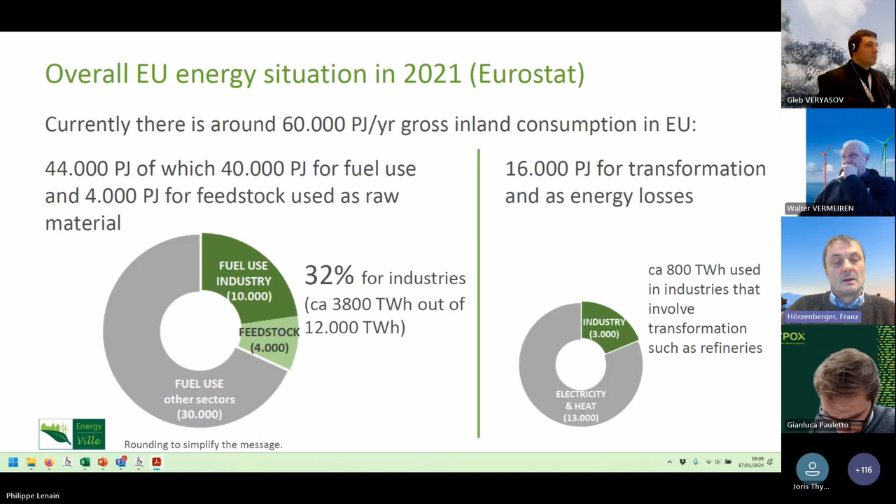Can we go to the next slide? So this is the situation for the industrial sector covered within A.SPIRE. Around 80% of the total energy consumption in industry is covered by the A.SPIRE sectors. Another interesting number is that around 25% of energy used in industry is electricity today - the rest is fossil energy. Can we go on to the next slide? So, let's stop here for a moment.

We got the opportunity to use the methodology which was developed between the DG ENER, so from the European Commission, and EnergyVille, the institute which is behind this study. They have developed a methodology to figure out the needs of energy based on the NUTS-3 level, so on a quite detailed level in Europe.

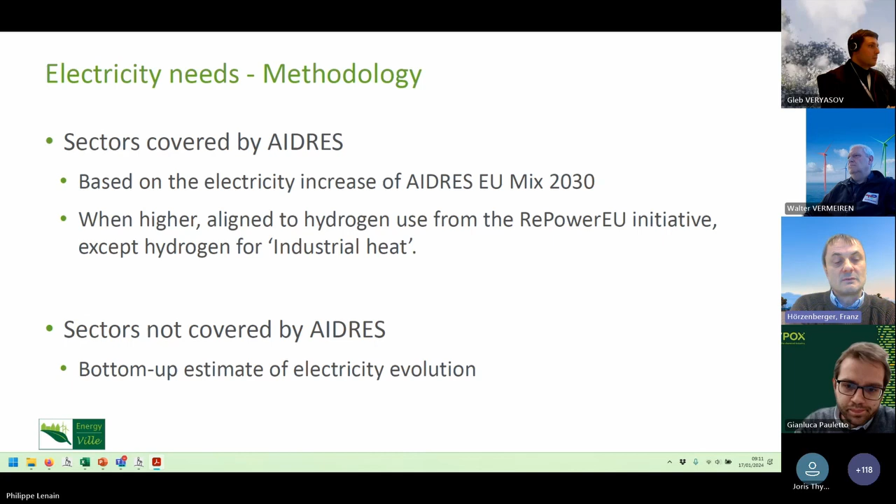And they also based their calculations upon policy documents. One was the REPowerEU initiative, but we also worked on an EU Mix 2030 scenario, which is somewhat modified towards industry. So these two scenarios have been used in order to calculate the energy or electricity needs of the future. Can we go to the next slide, please?

So here you see an idea of the energy needs of the future. Today, just to give rough numbers, around 1,000 terawatt-hours a year are used by the industry in Europe. So 1,000, just to remember this number. And what is projected with these scenarios is that around 500 terawatt-hours will be added until 2030. So more or less plus 50% electrical energy towards industry in 10 years. This is more or less the expectation which was calculated.

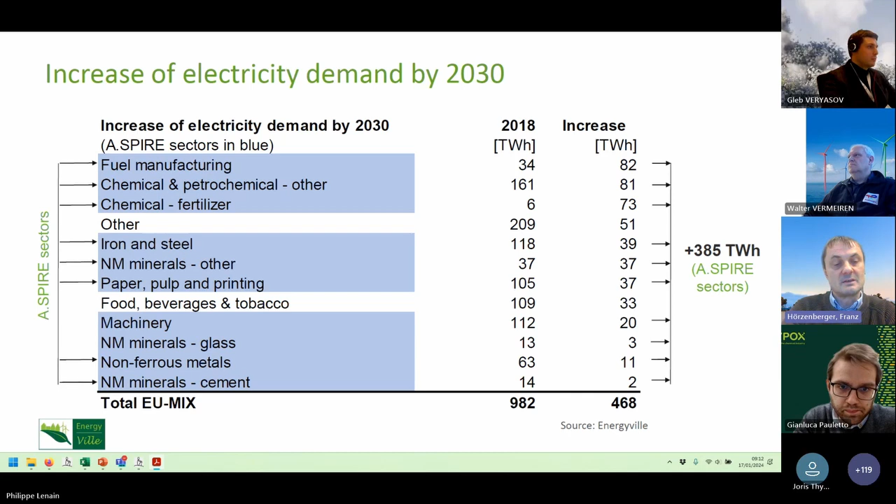Can you move on to the next slide? This we can skip, it's the same information as before. And as I already said, there are two scenarios which have been used for the calculation. One is REPowerEU. What is mentioned in REPowerEU as assumptions has been converted into energy needs. And you see here numbers for direct electrification and hydrogen, syn fuels, e-fuels, and then the fertilizer, which also needs quite some electricity.

And then there is another scenario, which is called the European mix. In this scenario, there is more direct electricity use, more production of fertilizers in Europe, but the direct production of hydrogen in Europe is lower. So these are the differences. Okay, we can move to the next slide.

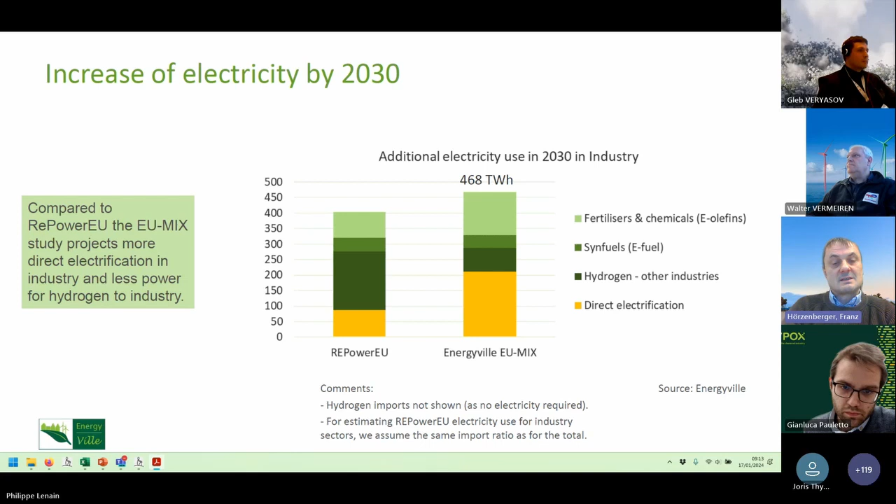So here is the summary. Compared to 2018, we need around 50% more electricity in industry. Around 50% of this increase goes to hydrogen plus derived fuels, chemicals, fertilizers, and the other half is more or less direct electrification of processes. So this is the estimation which has been found by this study.

Now we will move on to electricity supply, in the next slide. So here is still demand. This is more or less the same information as before, but now with all European sectors. One sector is industry, with around 1,000 terawatt-hours needed in 2020. Then we have the other sectors which are put together: mobility, residential, all the other sectors. And then there are also energy losses, which are mentioned here.

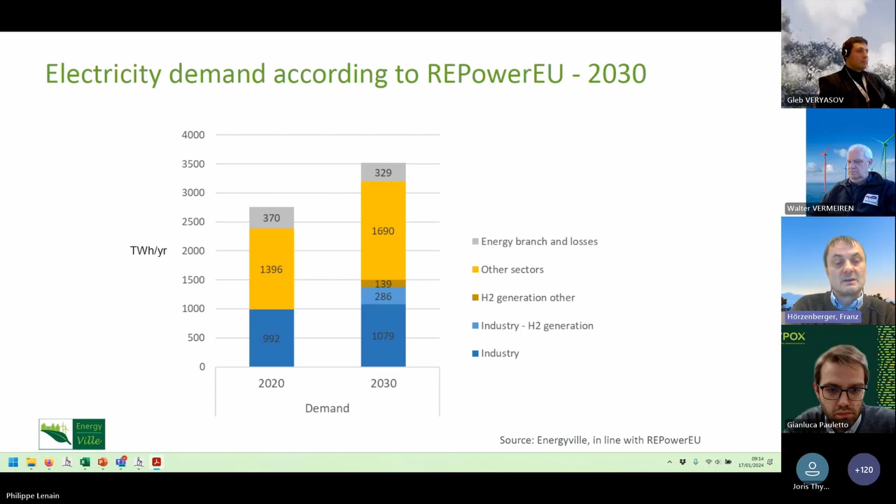And then there is a projection towards 2030, with hydrogen generation for industry included, and then the other sectors. So you see that the total electrical energy need is expected to grow towards around 3,500 terawatt-hours in 2030. This is the expectation that we made here. So the demand side you see here, and on the other side, it's about the supply side.

In 2020, using rough numbers, there is around 1,000 terawatt-hours of renewable electricity, and around 1,700 terawatt-hours of fossil-based electricity. In order to meet the demand in 2030, we need to increase the amount of renewable electricity and reduce the amount of fossil-based electricity. The amount of renewable electricity which is expected in 2030 is 2,400 terawatt-hours, according to this study. So can we go to the next one?

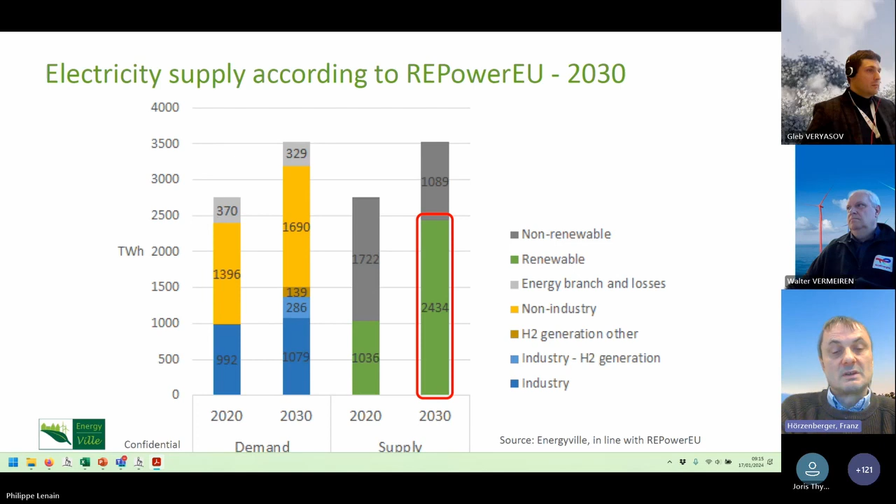Next slide. Now you see the same column that we saw before. It's around 2,500 terawatt-hours which is needed in terms of renewable electricity. The European mix scenario even says a little bit more, around 100 terawatt-hours more. And what we do on this slide is compare with the supply side expected according to different European scenarios.

The first one, in yellow, with 1,476 terawatt-hours, is the national projection. So if we continue like we do now, we will end up in 2030 with around 1,500 terawatt-hours, and the need is 2,500.

If we run with a speed of plus 50 gigawatts capacity expansion for renewable energy in electricity per year, then we end up with around 1,700 terawatt hours additional in 2030. There are different scenarios given here, which end up with different numbers, but you should look to the last one.

There is one calculation which is based upon 100 gigawatts per year renewable electricity extension. If this happens, then we are very close to what we should have. And there are two other scenarios which also describe that this could be possible in Europe. So you should remember that we need a capacity expansion of around 100 gigawatts per year, at least, in order to meet the electricity demand. Can we go to the next slide?

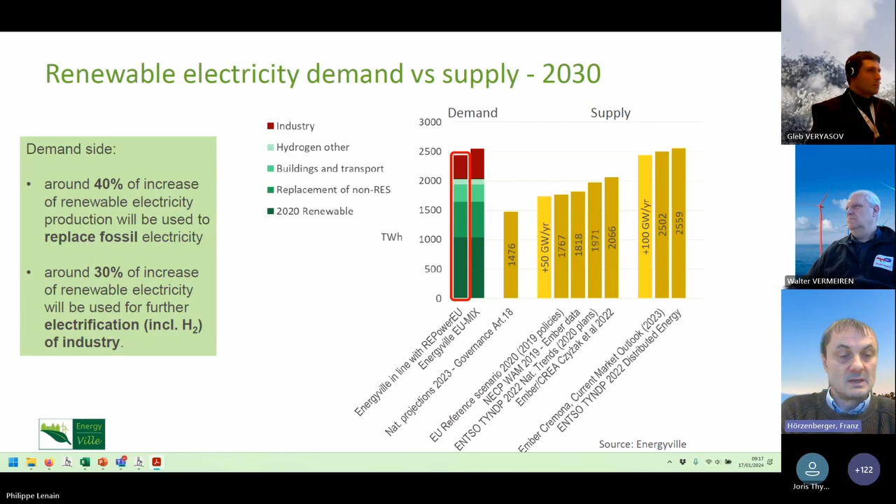According to the national projections, we have a gap of around 1,000 terawatt hours. So if we continue like we are, we end up with a deficit of 1,000 terawatt hours in 2030. If we are able to move with a speed of around 100 gigawatts per year extension, then we could be close to what we should have. Can we go to the next slide?

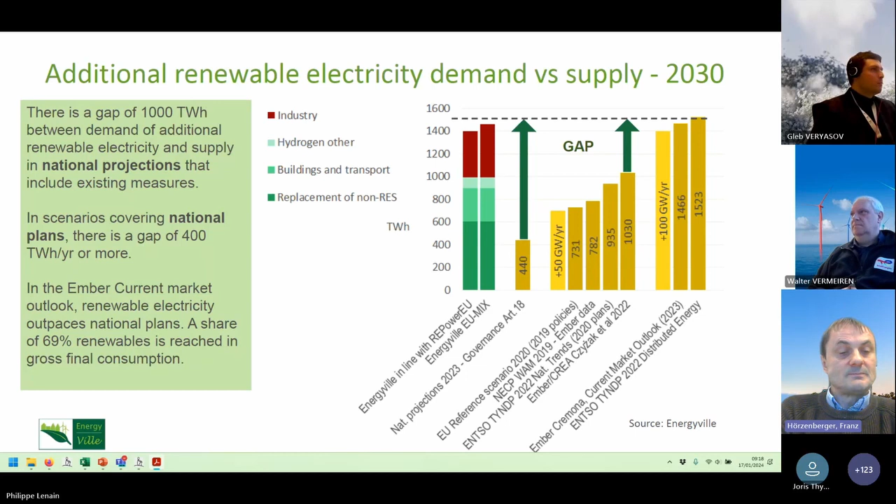These are now the conclusions from the study. Renewable electricity extension needs to increase by a factor of around 2.3, so 2 to 2.5. This is really necessary; otherwise, we will never reach this electricity supply in 2030. Future renewable electricity supply will fall short compared to the needs of the process industry in a scenario that incorporates REPowerEU ambitions. So if you follow REPowerEU, we will not have enough electricity available.

As I already said, with the national projections, if we continue like this, we will have a shortage of 1000 terawatt hours. If we follow national plans, which are much more ambitious than the national projections, we also end up with a shortage of around 400 terawatt hours a year. And in order to really be compliant with what we want to do, we really need these 100 gigawatt per year extensions for renewable electricity capacity. Next slide.

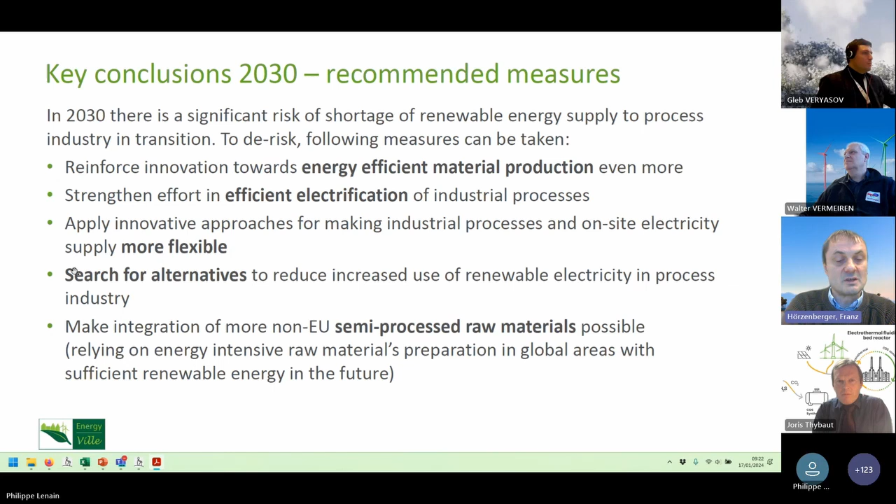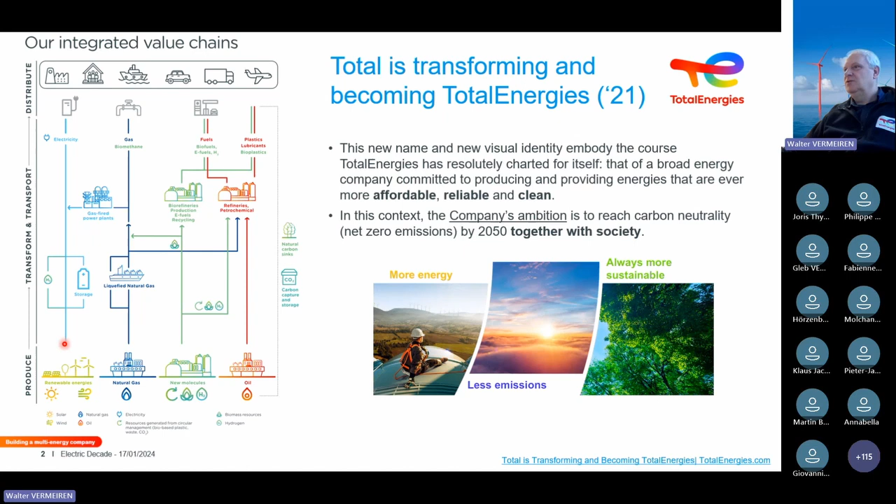So far, Total is still a very integrated company where we produce energy, we transform the energy into something that can be sent to the market, and we supply it to the customers. And what you will see is that we are moving from a fossil-based or a petroleum-based company more to a renewable energy company. And our vision is the following on this slide. So in 2022, our energy mix was still 90% fossil, so mainly petroleum, liquids, and natural gas. And we had a little bit of more or less decarbonized electricity and some biomolecules, biofuels, and some biopolymers.

We believe that in 2050 it will be completely different. So we will be a producer of 50% decarbonized electricity. 25% will be low carbon fuels like biofuels, but also the biopolymers will be part of that. And then still 25% will be fossil-based, so a little bit petroleum, and still a significant part will be natural gas. At the same time, we are convinced that our company has to capture and store between 50 to 100 million tons of CO2 per year by that time. So we are becoming more and more a multi-energy company that is undergoing this transition to a low carbon society.

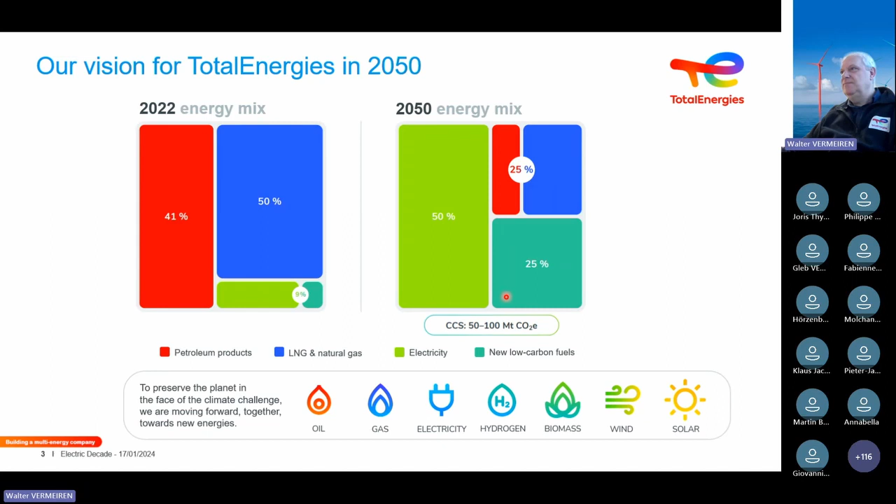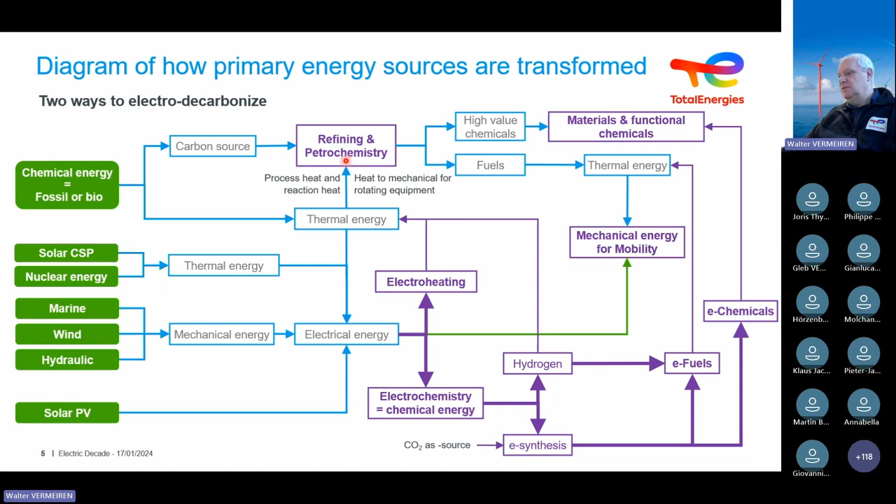So how much heat is in fact needed? If you look to the overall energy demand, roughly 40% is used by the industry, and of this 40%, more than 50% is just to produce heat to run the process. And this is today still mainly fossil-based. And what are now the temperature levels?

So 50% of the required heat to run the industry needs temperatures above 400 centigrade. And there is the interest to electrify, because for low temperatures, there are a lot of other opportunities to electrify or at least to decarbonize. In particular in refineries and petrochemical complexes, you need a lot of high temperature heat.

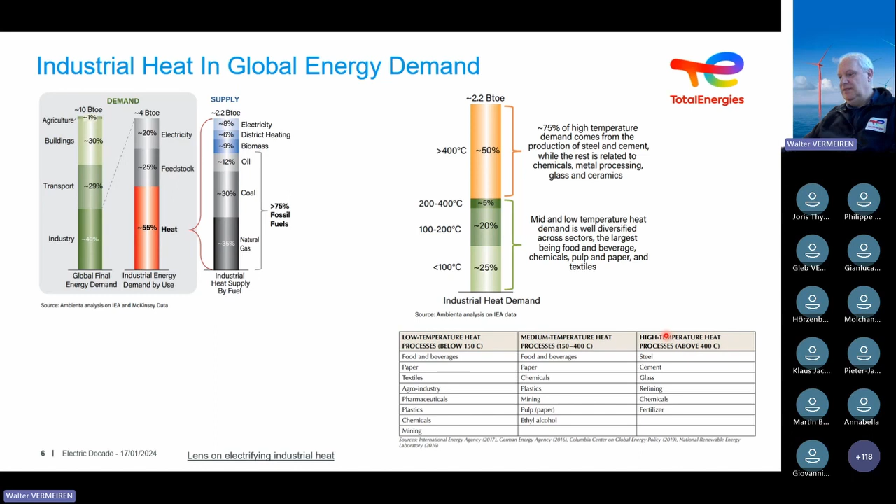Now, with respect to the cost of this energy, there is a significant difference today. So we have Europe and the US. The electricity cost in euros per megawatt hour versus gas, you see typically a factor 2 to 3 difference. So if we talk about electrification, we are going to use a source of energy that is at least 2 times more expensive than we are used to today. So this has to be considered. In case you have a high CO2 penalty, you can partially try to compensate this.

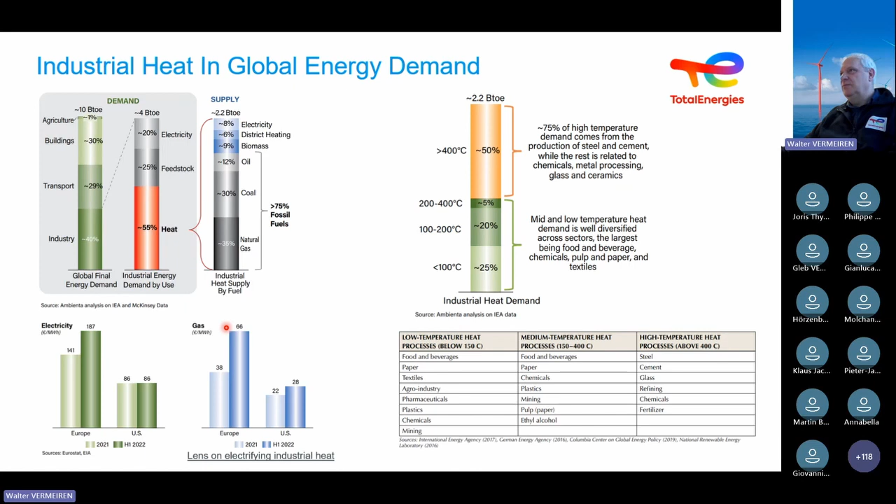Now, to come back to the 2 electro decarbonization concepts: direct electroheating or going via a kind of e-fuel. Just a comparison done by a consultant here. If you can use electricity directly for heating, you have overall 80 to 90% efficiency. So this is the concept of exergy. From electricity to heat, it can be extremely efficient.

If you would go through hydrogen, then you have first an electrolysis step, which is not extremely efficient. You have to compress and transport the hydrogen, which is not extremely complicated, but you need compression, and that again is energy. And overall, if you burn the hydrogen just to make heat, then you have 30 to 50% overall efficiency. So there is a factor 2 difference between direct electroheating or going through hydrogen.

So if you look now to the presentation of Franz, one of the big issues will be, are we having the right pace to implement the production of renewable energy, or electricity in this case. So it is important that we use this precious decarbonized electricity in the most efficient way.

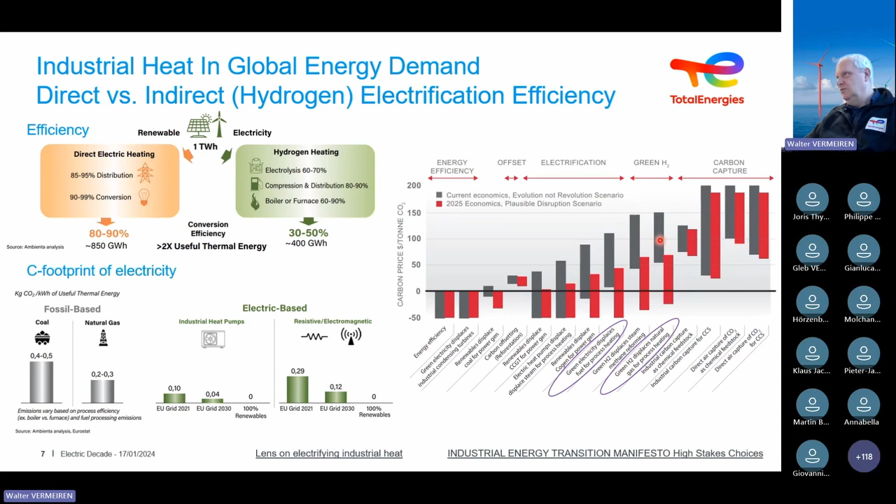A few years ago, KBC did a preliminary evaluation based on operational cost. What has to be the carbon price before someone would select a certain technology? It's evident that energy efficiency can already be economic today. If you look at electrification compared to green hydrogen, if you would use electricity for process heating, then you need a carbon price roughly around 75 euros or dollars per ton. If you would go through green hydrogen, it is twice as high. So this is something important to consider in the future.

So if we look typically at a company like TotalEnergies, we have these temperature levels. The highest temperature levels are steam reforming and steam crackers. Then in the refinery, a coker is high, and the rest is rather low. So electrification is probably the most opportune for high temperature processes, and in particular for processes that are endothermic. A process that is exothermic requires much less preheating. For instance, a hydrocracker is pretty exothermic, so your effluent comes out at a higher temperature than the feedstock comes in. If you optimize the heat exchange, then you don't need a lot of firing duty. So the most interesting conversions are the very endothermic processes.

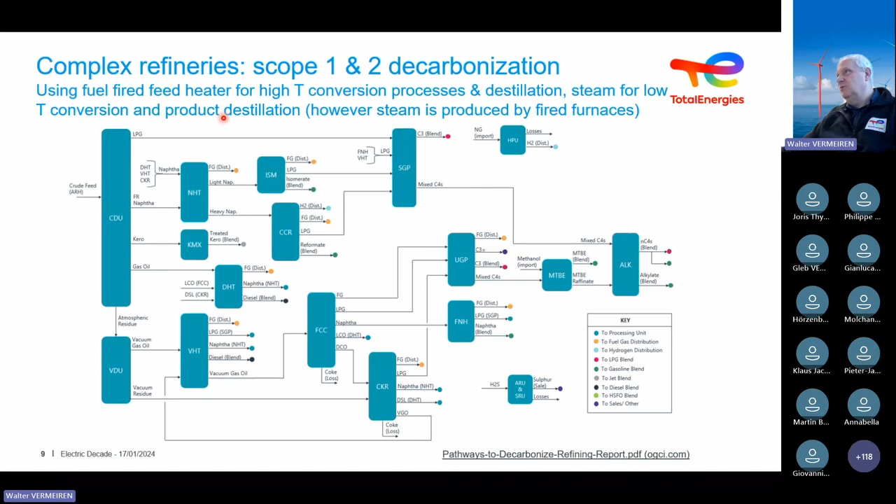With respect to refineries, which are very complex units with a lot of distillation, unit operations, conversions, and so on, some are exothermic, some are endothermic, and typically we have a lot of fired furnaces for high temperature processes and also for distillation. For instance, atmospheric and vacuum distillation go above 300 centigrade, so you heat with the furnace, not simply with a heat exchanger or with steam. Steam is typically used for low temperature processes and low temperature distillation. But we should not forget that steam is always produced in a fired furnace, so also emitting a lot of CO2. But for these operations, there are already, in principle, a lot of simple solutions.

A survey was done a few years ago, defining a kind of technology weighted score. This was done by OGCI, an association of oil and gas companies that exchange guidelines and opportunities on how to decarbonize our assets. So they developed a technology weighted score. It's evident that a few are very interesting already today, such as electrical drivers for turbines. Every time you can avoid condensing steam, you always have very high efficiencies. Electrode boilers can be implemented today because they have been known for many decades.

If you look at the heat replacement efficiency, they are all very close, because you have the efficiency of a furnace. So typically with electrification, you have a higher efficiency. There are two exceptions. One is using fatal, or low temperature, heat that is typically not valorized today: with mechanical vapor recompression, you have a very high heat replacement efficiency. And also if you avoid the condensing of steam, you directly gain a lot of efficiency.

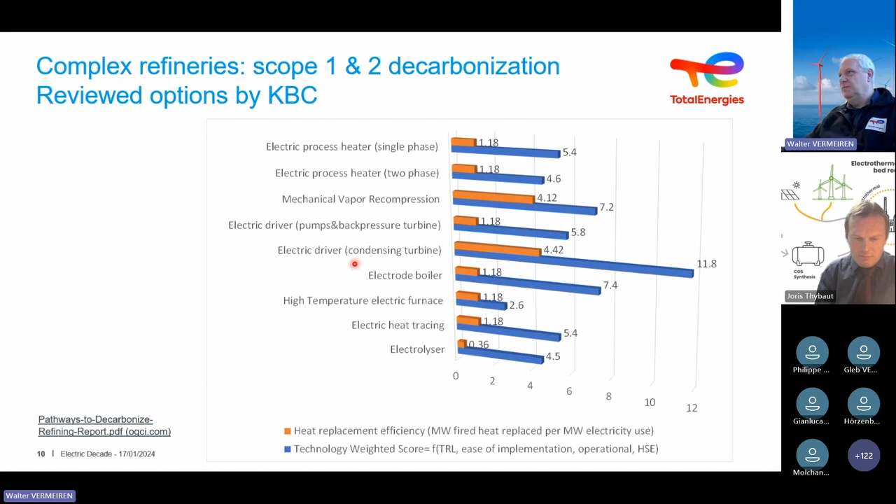So just two last slides on the Cracker of the Future consortium. A few years ago, we started this at the request of the innovation ministers in the Netherlands, Flanders and North Rhine-Westphalia, to save the petrochemical industry in this region, which is roughly 50% of the European petrochemical industry. They wanted to promote innovation, and the topic selected by the consortium was: can we electrify furnaces that run up to 850 centigrade?

This region is 50% of the steam cracker capacity in Europe. If we would need to electrify this, we need 170 terawatt hours per year, which is roughly 2 times the power consumption of Belgium. It seems a lot, but on the other side, it is perhaps not that much if we see that the installation of renewable power in Europe is going pretty fast.

It has to continue to go fast, but it is reasonable to decarbonize one of the initial conversion steps in the petrochemical industry, which is steam cracking, just by electrifying that.

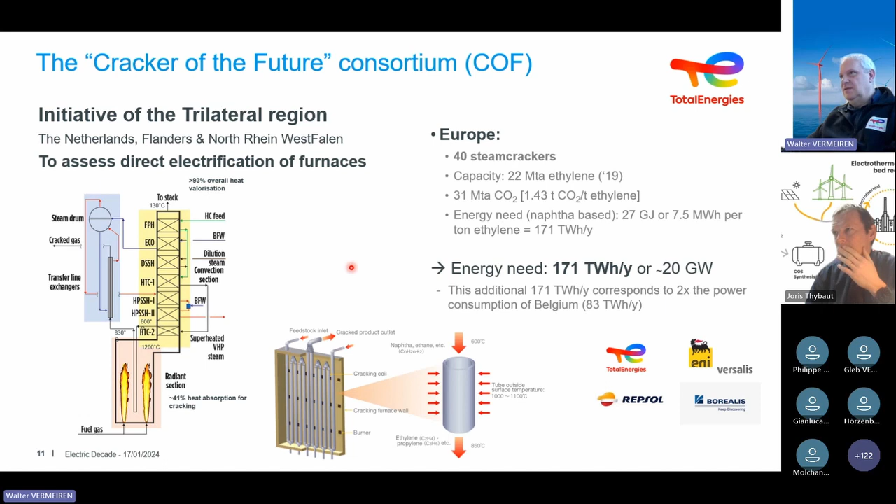This consortium has done a lot of studies on which type of heating technologies are possible. This is the conventional one: we have the firebox that radiates on narrow coils, so there is a transfer of heat from the coil wall to the molecules.

Finally they reach a high enough temperature that they start to decompose into olefins and aromatics. In the literature you see a lot of possibilities: microwave heating, radio frequency heating, electron beam, plasma technology, cold plasmas, hot plasmas. Shock waves can be used to heat up molecules. So there are a lot of possibilities.

The main or most well-known are resistive heating. They can produce infrared emission that is then conventional to a firebox. You can have resistive heating at the coil level itself, so you just put the potential on the coils. You can imagine inlays in the reactor that heat up the vapors.

I think Gleb will talk a little bit about the electrothermal fluidized bed, where you produce the heat on a particle, and the particle transfers that to the molecules that can then crack. And then you can also imagine inductive heating of inlays or the reactor wall of vessels.

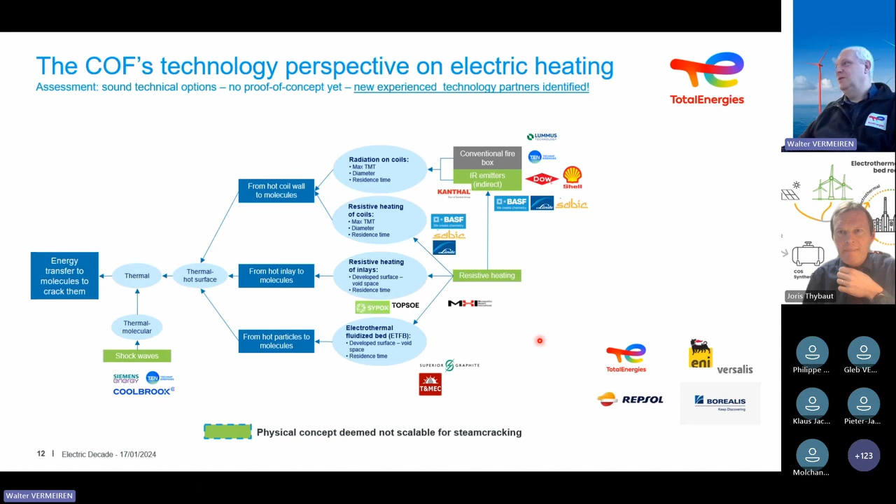Exactly, that's indeed what we will be working on, and what we are working on among other things, with the projects that will be presented in the next part of this workshop.

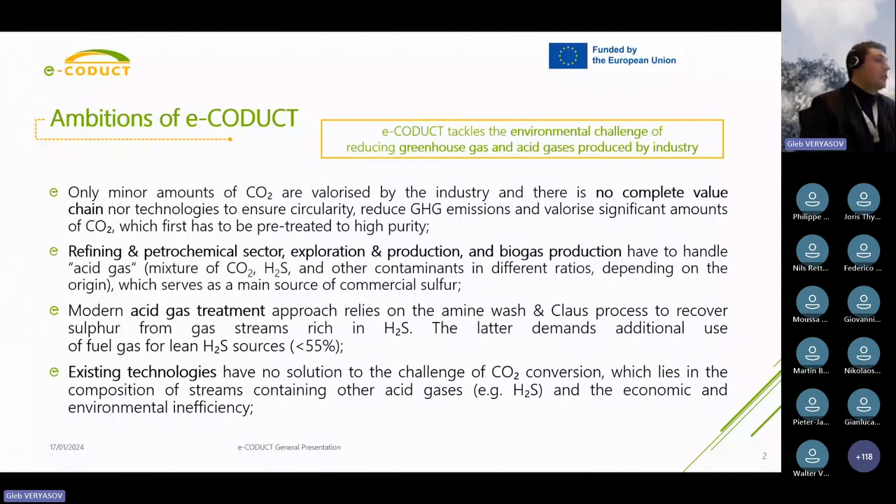The e-CODUCT project addresses all of these challenges, and we aim to convert mixed acid gas streams containing both CO2 and H2S. Our sweet spot is roughly 50-50 volumetric ratio, so this is the stream which would be potentially the hardest to tackle with existing technologies.

For instance, for sulfur recovery unit treatment of this stream, we would need to import fuel gas just to maintain flame, because such a dilute H2S stream is not suitable for Claus furnace. And for distillation, there would be very high energy demand with significant reject of CO2 in bottoms of the column.

We take the acid gas stream and treat it with a special catalyst adsorbent, which allows us to selectively produce carbonyl sulfide and remove water. Water is a side stream for us, and also a value for certain regions where water is becoming a scarce resource, which is why we contribute to the water-energy nexus economy. Then this carbonyl sulfide is decomposed thermally to produce carbon monoxide and sulfur.

These two steps are the core of the ēQATOR technology. Carbon monoxide is a versatile platform molecule that could be used, for instance, for Fischer-Tropsch process, aromatics production, methanol production, and paraffins up to sustainable aviation fuel grade. In our case, we selected methanol production as a well-known reaction, and we use a commercial catalyst with hydrogen import just to showcase that our carbon monoxide is convertible, so we could really valorize it.

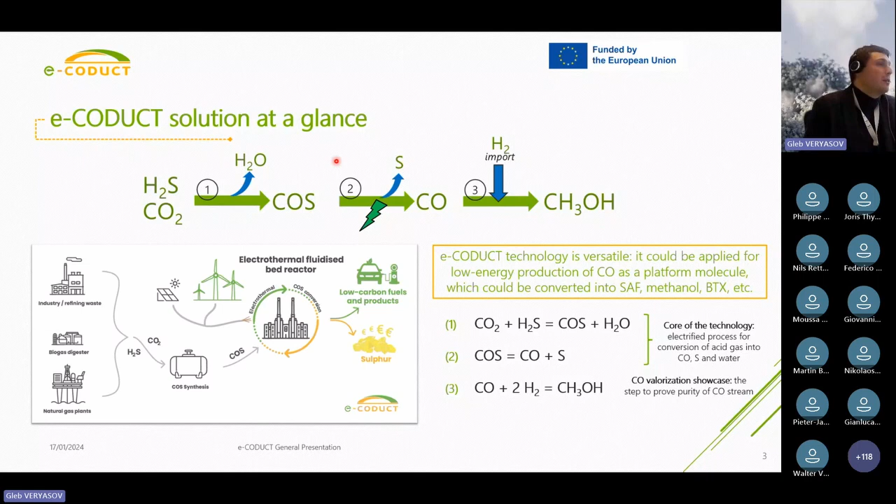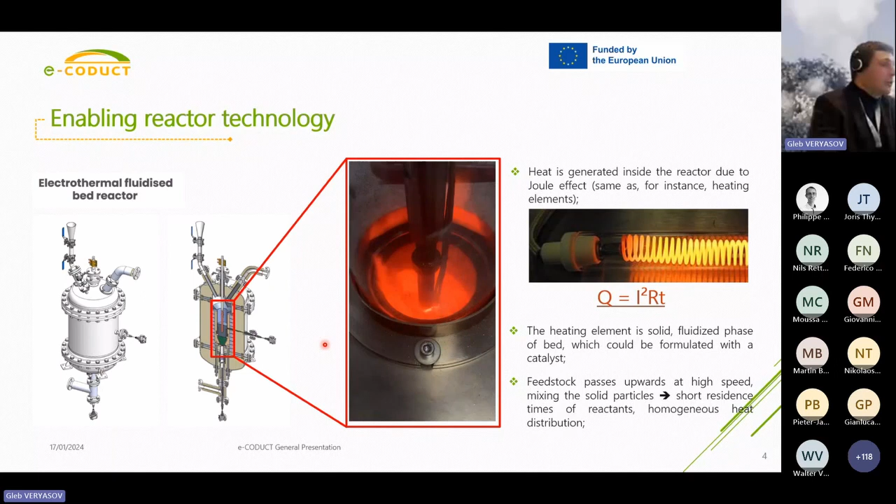The feedstock in our case is going upwards, and the gas creates this fluidization, which has a double function. First, it contributes to resistivity, an important factor for creating heating inside the catalyst bed, and it also allows short residence times and homogeneous heat distribution inside the reactor.

What is the competitive advantage of e-CODUCT technology and why we decided to select this pathway?

As I mentioned briefly, we could benchmark it against existing Claus process, where we will first need to concentrate our acid gas, or we will need to accept importing significant amounts of fuel gas, which would mean that we'll also increase our Scope 1 emissions. Another possible benchmark is CO2 electroreduction using, for instance, SOEC technology. Just thermodynamically, carbonyl sulfide is somehow a pre-activated molecule, or less stable molecule, than carbon dioxide, which would mean that just to convert this molecule, we will need to supply less energy compared to CO2.

The other side, of course, is that we could treat mixed streams. For comparison, SOEC technology is extremely sensitive to any contaminants, so any sulfur slippage to the cell, which is the main contributor to CAPEX, will irreversibly harm it because ceramics will get sulfidized and there will be physical cracks due to crystal structure change. Another important thing is that we co-produce sulfur, which is in principle a marketable product with quite high demand—we speak about roughly 100 megatons a year—while in the existing CO2 electroreduction approach, on the other side of the membrane there is just sweep air, and oxygen is vented in the form of oxygen enriched air, so there is some fatal heat constantly lost in the case of SOEC utilization.

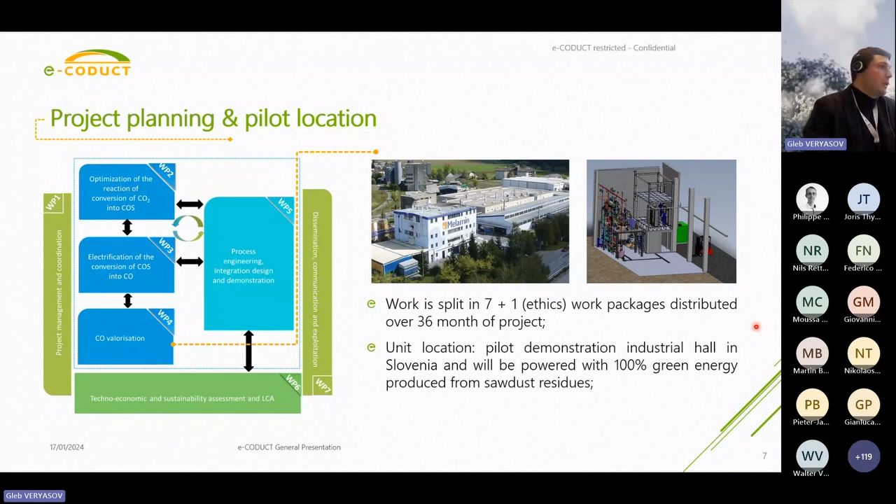If one day we rely on solar cells or windmills, we'll also account for variability of feedstocks, because those familiar with the refining industry know that acid gas as a feedstock could vary, since it's in principle a final waste of refinery operation. At the end, we'll have certification for sulfur quality and for methanol quality as a final product, and on this basis, Total Energies will create a business case for potential exploitation of the technology in one of our assets. Today, we already started analysis of different

market shortages for sulfur, for instance, and for methanol. There are some good scenarios which I think create a very interesting future for the technology. This is the final slide of my presentation. Thank you for your attention, and I'm open to questions.

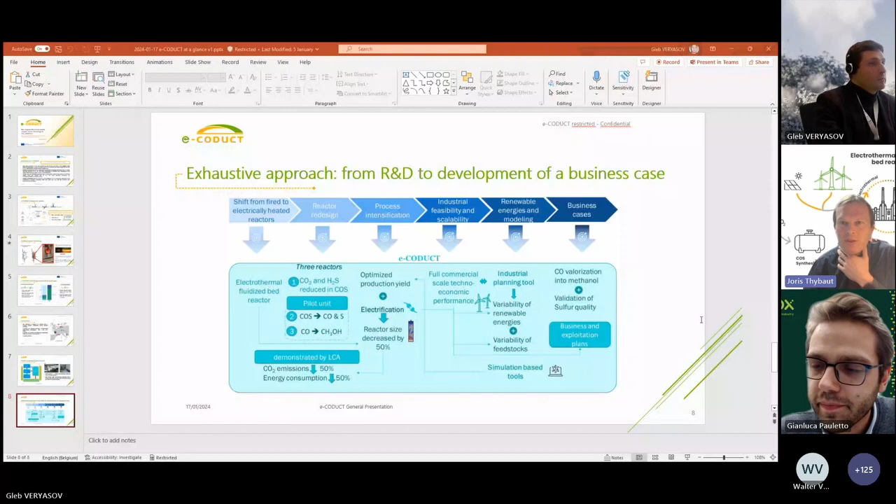from SciPox on the project EReTech. So Gianluca, the floor is yours. Super, thanks. You can hear me well, right? Yes, we hear you well. Super, so I think I'll just start sharing the screen. Good.

And you can also see my screen now, right? Yes, and now it's effectively in presentation mode. So all set to go ahead.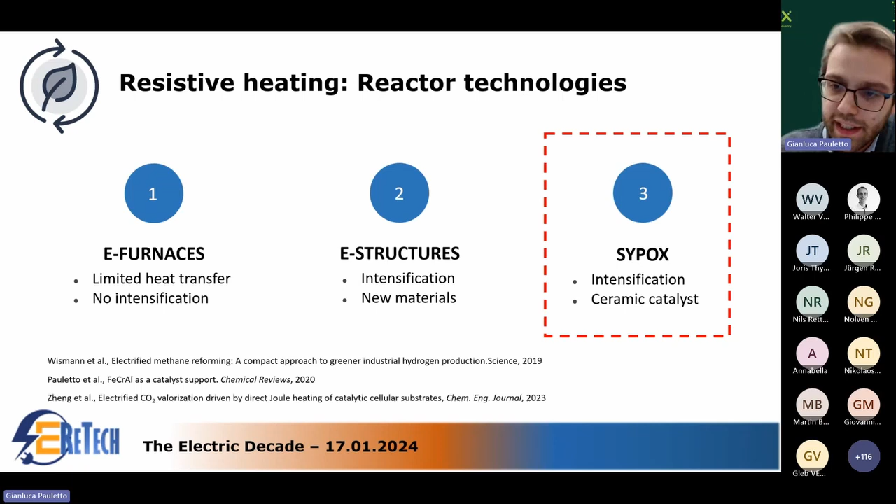And then we have another solution where you use a ceramic catalyst, and you install heating elements within the ceramic bed that are in close proximity to the catalyst as well as in direct contact with the reacting gas. This is the technology that we are using and scaling up within the EReTech project.

What is the advantage, and what were we able to achieve before starting this? We saw that it's possible to reach temperatures as high as approximately 1,200 degrees Celsius. And you can also achieve a huge intensification, meaning you are able to provide a lot of heat in a small volume. We will also talk later about a power to volume ratio that can be as high as 25 megawatt per cubic meter.

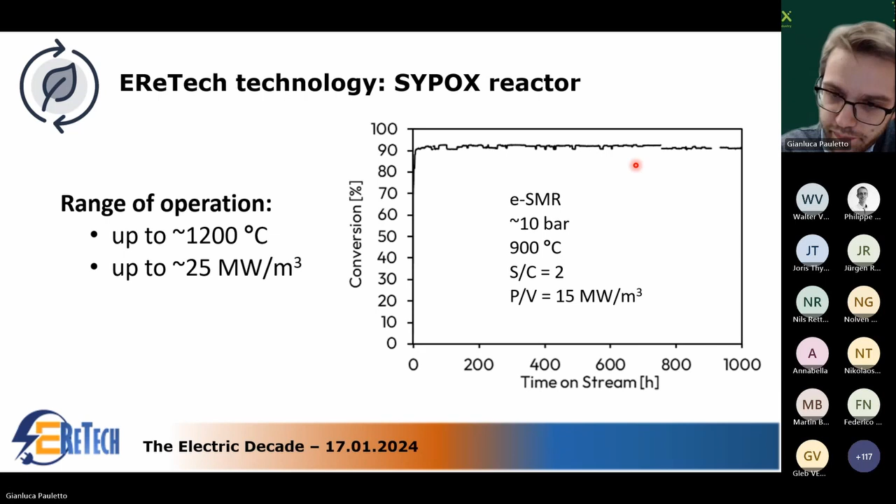This was the starting point of the EReTech project. The objectives are to develop and validate an electrically heated steam methane reforming for mainly two applications. One is decentralized production of hydrogen, converting biogas. The other is a centralized application where we want to decarbonize a traditional steam methane reforming plant, thus being able to have low carbon hydrogen.

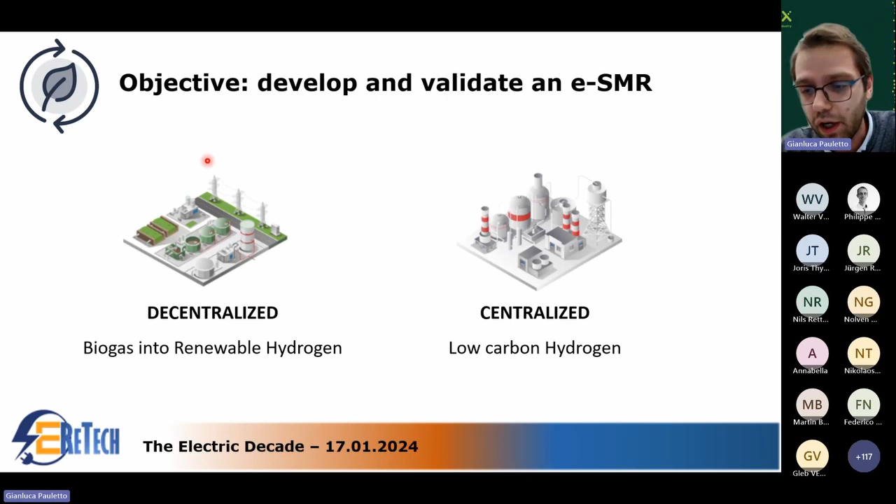I guess all of you are familiar with steam methane reforming, but maybe just a brief overview. What is steam methane reforming doing? We are taking methane and reacting it with water to produce syngas. This first step of the process is extremely endothermic and takes place at very high temperature, above 700 degrees.

The second step is the further conversion of the CO with water to produce extra hydrogen, and here we have a mildly exothermic reaction. Overall, from one molecule of methane we go to four molecules of hydrogen. The overall process is extremely endothermic because approximately half of the hydrogen in a steam methane reforming plant is coming from water.

How are we currently running this process? We have a feedstock, methane, used as a reagent. We also have methane used as a fuel to produce the heat necessary to compensate the endothermicity of the reaction and to reach the very high temperature. What we get out of the process is 1 kilo of hydrogen and 10 kilos of CO2 per kilo of hydrogen.

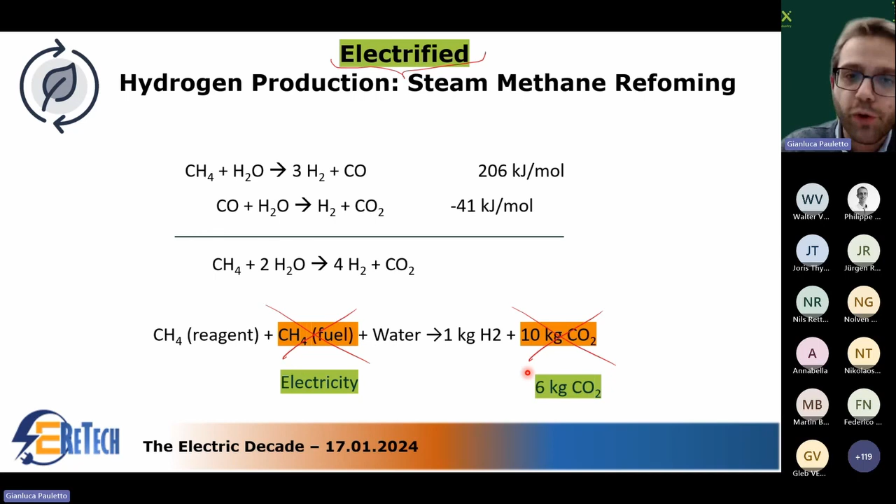It is clear that this is not currently possible. There is no technology at scale that can be applied for large systems. What we mainly need to work on are actually the activities we are trying to cover within EReTech. The first thing we need to work on is the catalyst. The question we need to address is: if we take a traditional reforming catalyst, would we be able to use it? Would the catalyst have enough stability and lifetime?

As I mentioned at the very beginning, with an electrically heated reactor you achieve a very high power to volume ratio, meaning a very high intensification. That is extremely positive on one side because you have a small plant footprint and small capex, but at the same time you can allocate only a very limited amount of catalyst inside the reactor. So you really need to make sure that catalyst is stable and has the lifetime the industry requires.

This, of course, is a challenge that is now raised with an electrically heated reactor and was not in the case of traditional steam methane reforming, because there the amount of catalyst that could be allocated in a firebox was much more than the amount of active phase the reaction really needed.

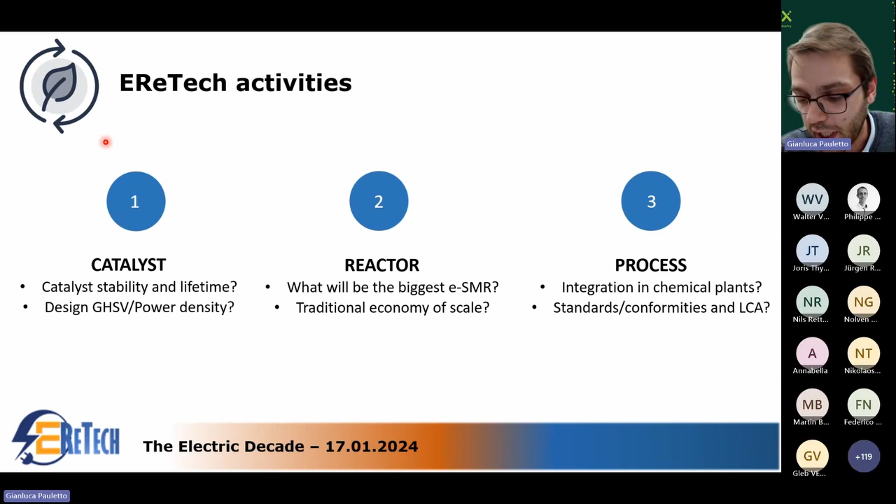Well, we are working on addressing these questions with the consortium, and the consortium is, as mentioned at the very beginning, involving 50-50% industry and research and university, and we are covering the whole value chain. So from the technology development and catalyst development up to the final commercialization of the hydrogen. And you can see here an overview that we are also following in the consortium structure, two main paths: how can we address a decentralized hydrogen producing plant, and how do we address a centralized plant.

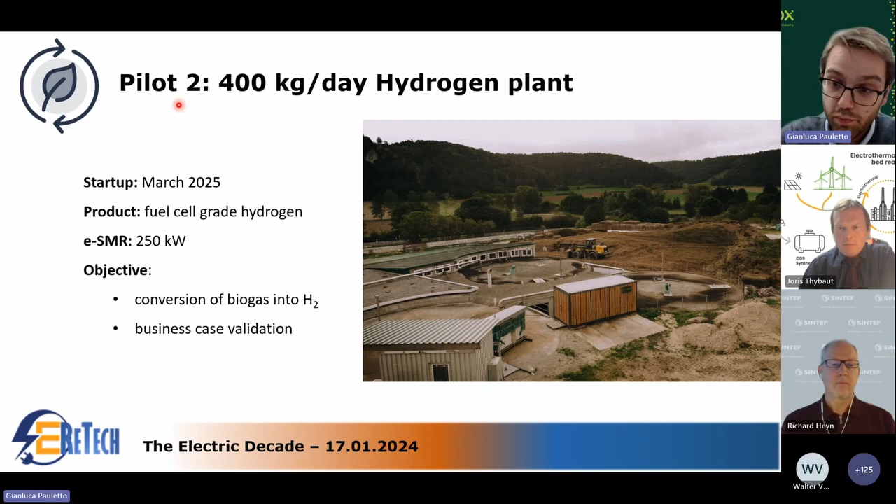We know that the final target is having a system that is fully decarbonized. So we want to go, for instance, for electrolysis. We want to have 0 CO2 emission per kilo of hydrogen. But if we immediately go this way, we will need approximately 50 kilowatt hours of electricity per kilo of hydrogen produced. And of course, we are decreasing the CO2 emission by 10 kilos. If now we go for an electrically heated steam methane reformer, we need 14 kilowatt hours per kilo of hydrogen, and we are still emitting 6 kilos of CO2, but we have avoided 4 kilos of CO2 per kilo of hydrogen.

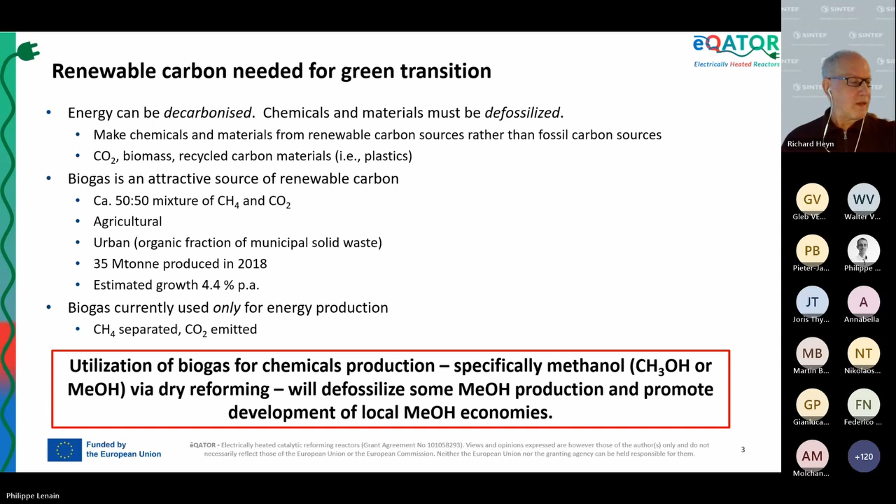Next slide, please. So methanol, as many of you may know, is an important base chemical. It has a large global market size. It's a starting point for fuels, a number of different chemicals and polymers, and a world-class methanol plant produces around 3 million tons each year. Our goal is not to replace these large-scale world-class methanol plants. What we would like to do is try to make methanol on a smaller scale and more locally.

And the benefit of this is that methanol today is produced by steam reforming of natural gas to syngas, which is a mixture of carbon monoxide and hydrogen, and then you make the methanol. The emissions from making that syngas today account for about 10% of the CO2 emissions from the chemical sector.

The only exception to the large-scale methanol production that takes place today is a CCU approach, for example, Carbon Recycling International up in Iceland, and you have around 0.2 megatons of renewable methanol produced each year. Next slide, please.

So the objective of the ēQATOR project is to make syngas from the dry reforming of methane rather than from the steam reforming of methane. Now, this is a more difficult reaction in that the catalysts that you use for dry reforming are much more prone to coking. But this is also an endothermic reaction, just like steam reforming of methane, so you can use electricity to do so.

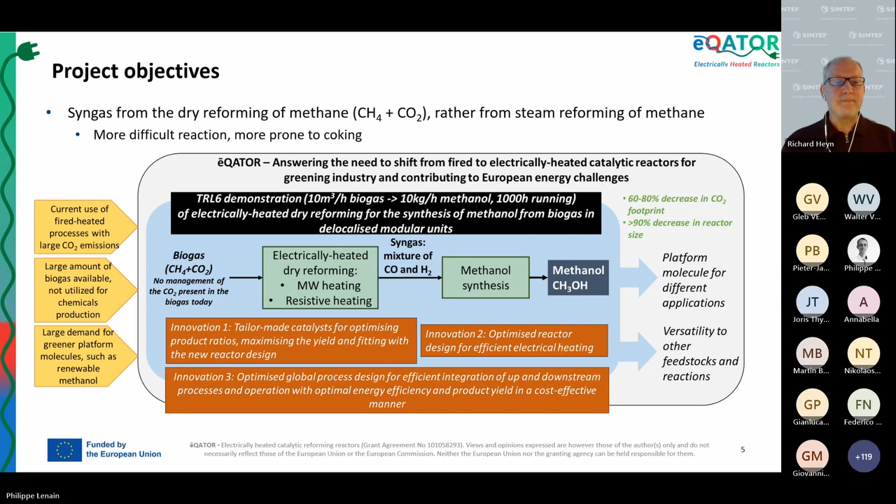So as I've mentioned, catalyst coking is very important. It needs to be minimized and avoided to the amount possible. And what we've done is we've developed two different processes to look at that will minimize our coking potential. So we have what we call a dry reforming process, which is simply methane and CO2, which starts from a biogas composition like that you get from making biogas from the organic fraction of municipal solid waste.

We have a second process that we call the mixed reforming process, where water is added. We expect that to be a less risky proposition, but that mixed reforming process starts from biogas composition that is produced from agricultural residues. And what we've been able to do is we have a catalyst composition that shows minimal coking with the dry reforming gas mixture over 100 hours.

So on the left-hand side, you see the stable CO2 and methane conversions, and we have a syngas ratio of about 0.4. And on the right-hand side, you see the coking profile of the catalyst after the reaction, and essentially there is no coking that is observed. So we have a very good starting point in order to have a catalyst system that we can integrate into our electrically heated reactors. So how do we do that? And I'll just show the examples for the resistive heating on the next slide.

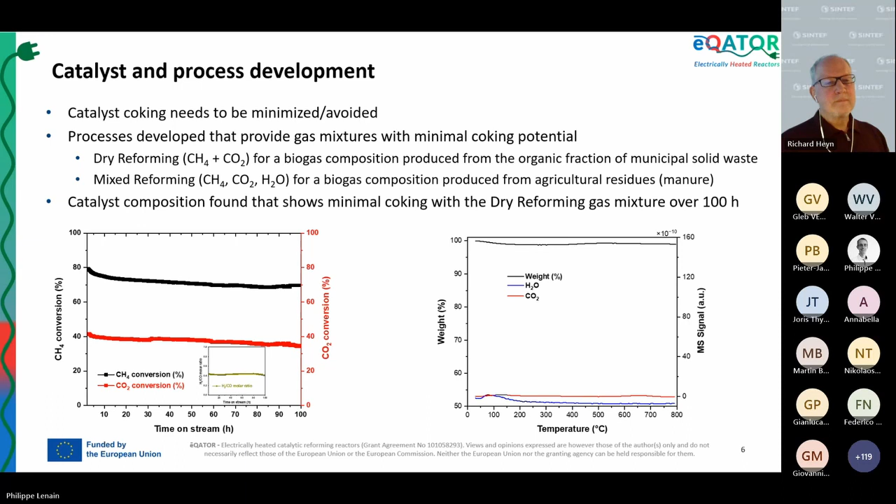On the next, yes, thank you very much. So for the resistive heating, we will be having coated honeycombs. These are electrically conductive honeycombs. The catalyst will be wash coated on these honeycombs, and then these honeycombs will be coupled with electrodes, a fiber mat, and a metal housing.

And what we'll be doing with these honeycombs is we'll be setting them up in sequence so that we can have a parallel set of honeycombs that can be individually steered for the temperature, so that we can control the power and the heat that goes into each honeycomb in order to match the reaction kinetics that we need to make the most effective synthesis gas. And that is shown in the figure on the right-hand side, where we have a modeled schematic temperature profile and conversion over this cascade length, where we have multiple honeycombs set up in parallel.

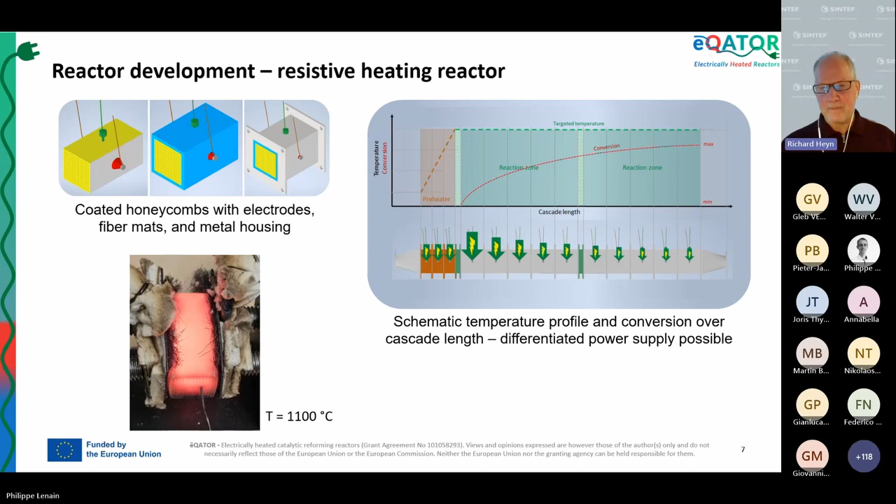At the bottom left-hand side, you see a nice picture of how this works, so that one of these honeycombs can be heated without any issues up to 1100 degrees, and that the temperature is achieved within a minute or so. Next slide, please.

So the key impacts of this, as I mentioned, the steam reforming of natural gas to make methanol has a very high CO2 footprint. It's about 10% of the CO2 emissions from the chemical industry, and we expect to save 60 to 80% of the carbon dioxide emissions from that methanol synthesis with our technology. We expect around 7 megatons of CO2 per year saved by 2030, and up to around 45 megatons CO2 saved per year at 2045.

Because we're doing this electrically, and as has been commented before, we expect higher capacity conversions, we expect more compact reactors, we expect higher energy efficiencies, and we have these novel optimized catalysts already in-house for this biogas valorization to methanol. Next slide, please.

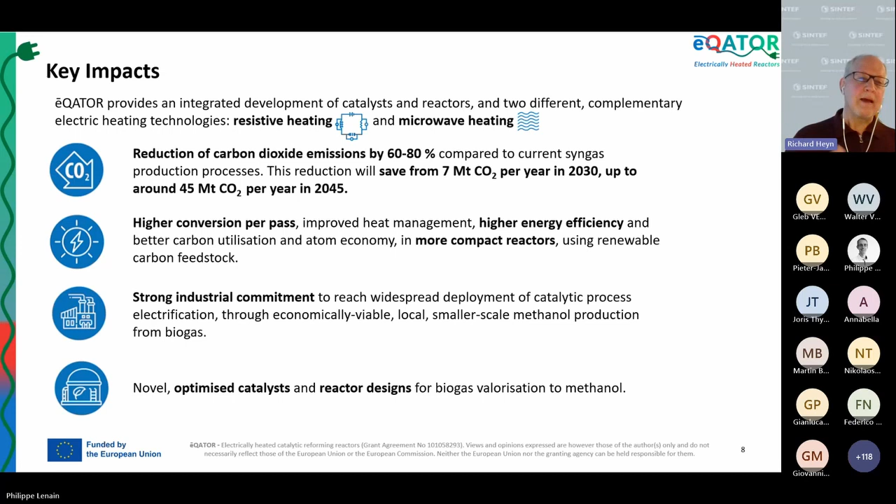So as I stated, we aim to have a TRL-6 reactor in place, demonstrated by the end of the project in November 2025. We will be demonstrating both the resistive heating and the microwave heating with these two different gas mixtures. So essentially there'll be 4 pilot campaigns run in the pilot plant. We'll be doing the dry reforming with both the resistive heating and the microwave heating, and then we'll be doing the mixed reforming with both of the heating technologies as well.

We'll be having a 10 cubic meter per hour feed, doing it for 1,000 hours, which is roughly 7 weeks. The methanol production step will be done on a modeled gas from the syngas compositions we get out of the reactors. We expect a full-scale plant to have a feed of around 500 cubic meters per hour.

One of the things we're aiming to do with the TRL-6 reactor design and construction is to have a material selection which allows upscaling without having to do a re-engineering. Also, the parallel reactor configuration allows us to upscale this technology very readily, depending on the amount of gas that we need to implement.

So the next step, assuming this project is successful with a positive economic and environmental outlook, we would need to do a combined reforming and methanol production at say 100 cubic meters per hour scale. Next slide, please.

Joris? Yes. Hello. Right before we were seeing the presenter screen, so we were not seeing the slide. Let me, let's say if I do like this, is it correct or not? Yeah, like that, it's the good one. Okay, so I will not move from here. Okay. Fine. Well, David is there, and the people I encountered here in the corridor were also going back to their computers, so I think we can slowly get started again.

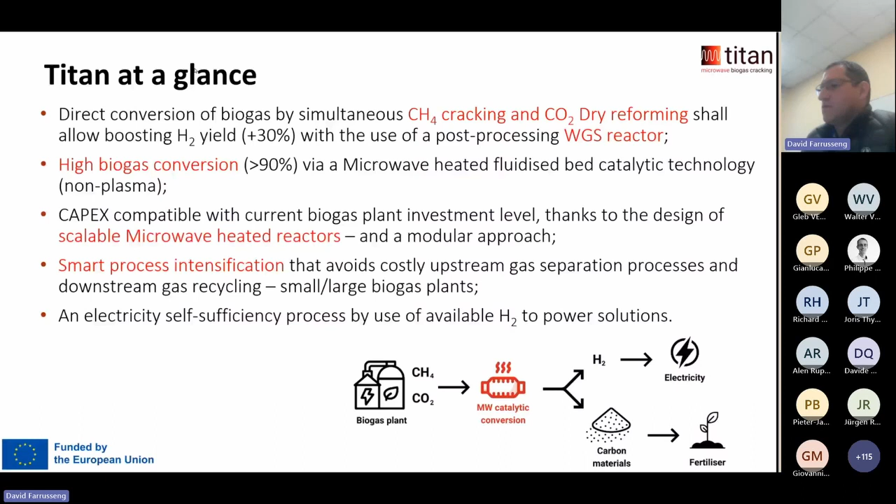We want to look at a scalable microwave reactor. I will have a slide on that. And we want to have a global process point of view, I would say.

Basically, we claim that eventually we would have a negative emission solution because the carbons come from biomass, and here the technology will not produce any CO2 because the carbons will be stored as solid carbon, which would make the global carbon balance negative. We also want to use abundant and non-toxic catalysts, particularly because we want to recycle the carbon into other materials or for fertilizing the soil.

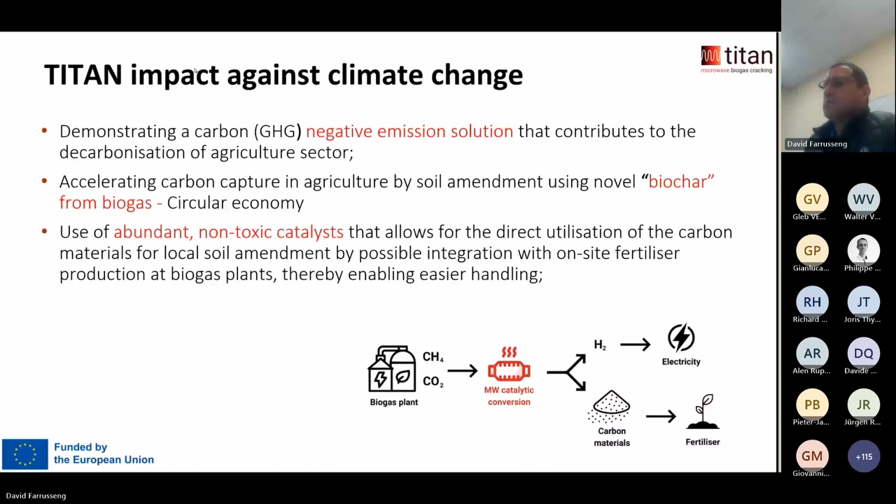So here are, I would say, very first results. First we screened catalysts in conventional heating reactors using electric heating with a model biogas mixture of a 2-to-1 ratio, and we use iron-based catalyst, very cheap.

Good fluidization, because we want to look only for fluidized bed. What you can see on top is the conversion of CO2 and methane, which depends strongly on the temperature. We can go to almost thermodynamic equilibrium at only about 900 or 950 degrees C. If you measure the carbon balance, you can see that at higher temperature than 850 degrees C, methane cracking occurs and you produce carbon.

You will see that in the next slides. Whereas if the temperature of the reactor is below 850, the carbon is gasified by the Boudouard reaction, producing carbon monoxide. So it's crucial to operate at high temperature, both from a thermodynamic point of view and to produce the carbon.

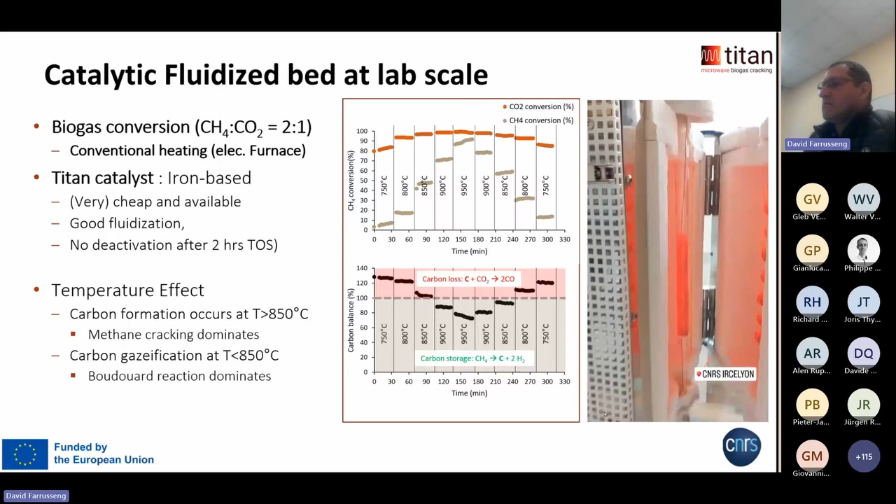So you can see here on this video, I hope you can see it, a fluidized bed working at 900 degrees C with the iron-based catalyst, very hot, in fact, like lava. We do not see deactivation even after 2 or maybe 3 hours on stream.

We achieve thermodynamic equilibrium and produce about 30% yield of carbon, which at the end of the day gives an outlet of 60% hydrogen, 30% CO, and very little methane and CO2. So basically you produce a syngas with a 2-to-1 ratio, and at the same time you produce carbon at 0.3 kilograms per kilogram of catalyst per hour.

You can see the size of the bed before and after 3 hours. You really produce and store the carbon, while some has been collected on top of the reactor.

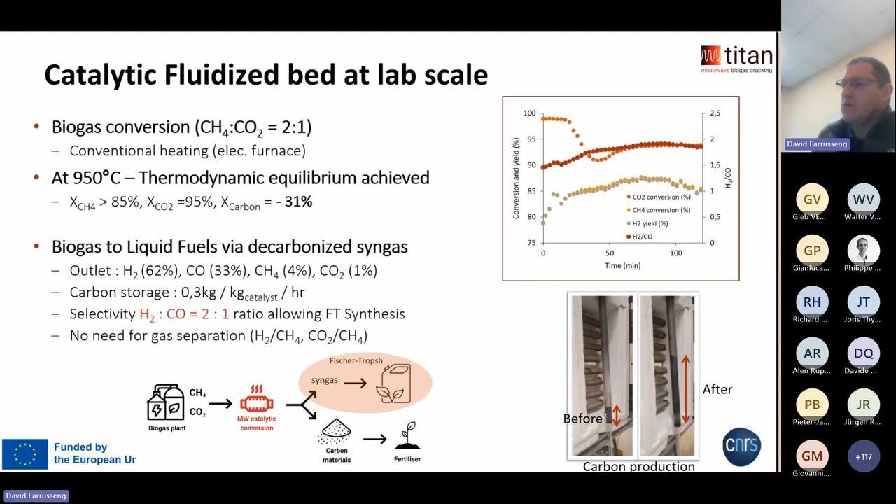That would mean that with this outlet stream of 2-to-1 ratio, you could think about another catalytic process, namely Fischer-Tropsch, to produce hydrocarbons. So with only 2 catalytic steps, you could go directly from biogas, with some purification but no need for gas separation, to liquid hydrocarbons you can either use or transport.

So in contrast to the classical methane reforming, dry or steam reforming, here what we really want to do is coking. Coking is more an ally than an enemy. Of course, we have to collect the coke and then use it, and the value of the carbon produced is very important for the whole economics of the project.

The market for carbon has very different specifications depending on the application. There are many types of carbon, and we characterized various carbons, including our own. We figured out that the carbon we produce is of the class called turbostratic, which is amorphous but still organized. It's not graphite, but it's in between amorphous and very crystalline graphite.

And for that, there are some applications. There is a but: the carbon we produce is contaminated by some iron, and that has consequences on the market, of course, and the value of the carbon.

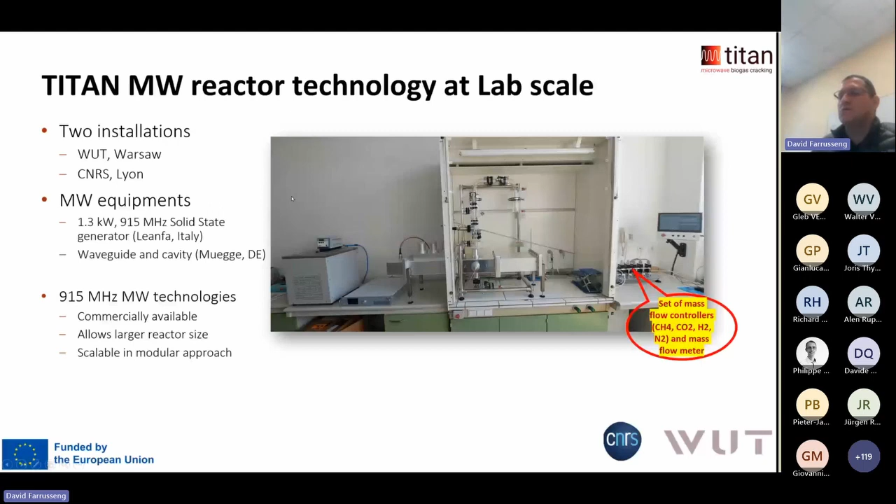It also allows a much larger reactor size than the conventional 2450 megahertz, and overall, the 915 megahertz technology is more energy efficient than the more conventional one we know from our kitchen.

Would you have questions here? I think Marilena Radoiu from MTC Technologies should be present here and could provide you a more detailed answer to the microwave technology, which is of course key in our project.

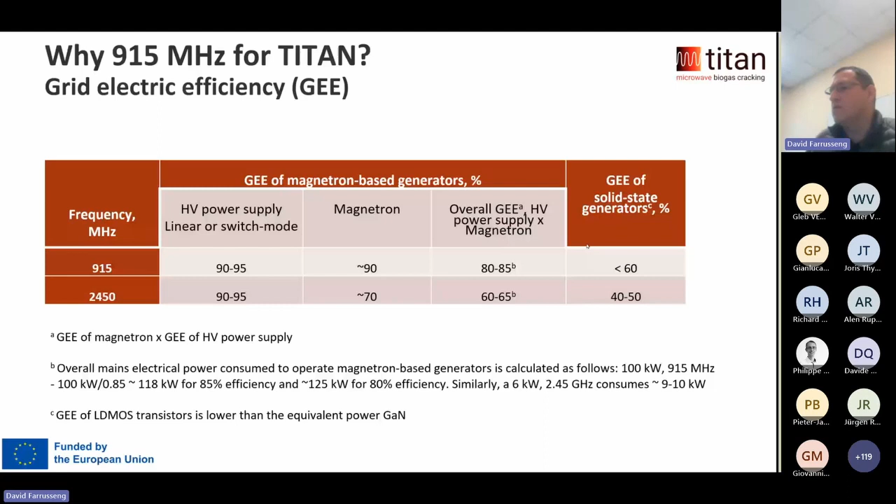We have to face a major challenge in the upscaling, from the lab reactor to the demonstrator reactor, because this is not linear. Basically the heating is not linear, because the fluidization depends on the volume flow, which depends on the temperature of the gas phase, which depends on how good the catalyst heating and thus microwave absorption is, which depends on where the particles are located and on the fluidization.

So basically everything is dependent, and temperature control in microwave reactors is particularly difficult. You cannot use a thermocouple, so we have implemented a pyrometer which monitors the temperature along the bed, over all the bed, and then controls the power of the microwave system.

So you can see here fluidization of our catalyst in a small reactor in the microwave reactor, and you can see that with this monitoring and control of the power by the pyrometer, you can really well control the temperature of the bed.

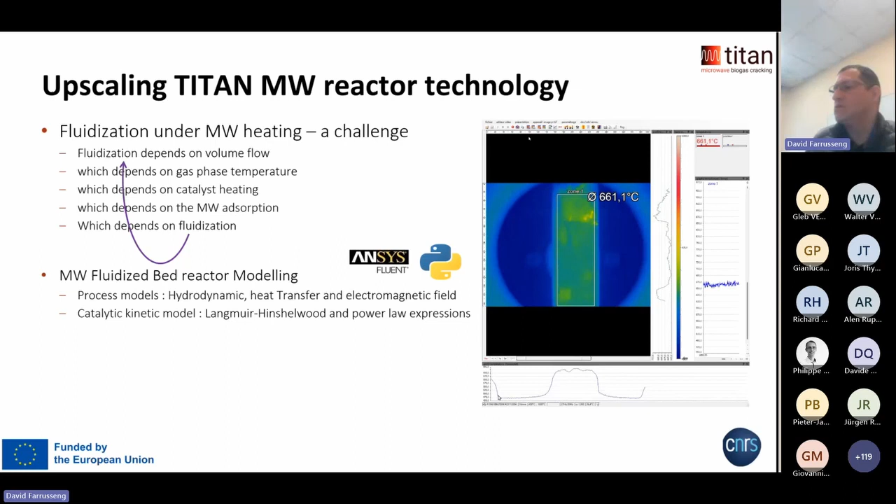We consider 2 scenarios, one small scale biogas plant and one large scale, because they have different advantages and constraints. We believe the processes put together will be very different. Possibly for the smaller plants we may envisage a Fischer-Tropsch reactor, whereas for the largest, maybe hydrogen can be used on site, for example.

With that, I would like to conclude and mention 2 key conferences where you may present your results or contribute. Of course, the first would be in July in Lyon, the International Congress on Catalysis. Unfortunately the abstract submission closed in December, but there will be talks on methane reforming and new ways of

activation of methane. But you can still apply and submit an abstract to the 3rd International Conference on Unconventional Catalysis, Reactor and Applications, chaired by Andrzej Stankiewicz from Delft and now Warsaw University. So there will be sessions, I think, on our topic.

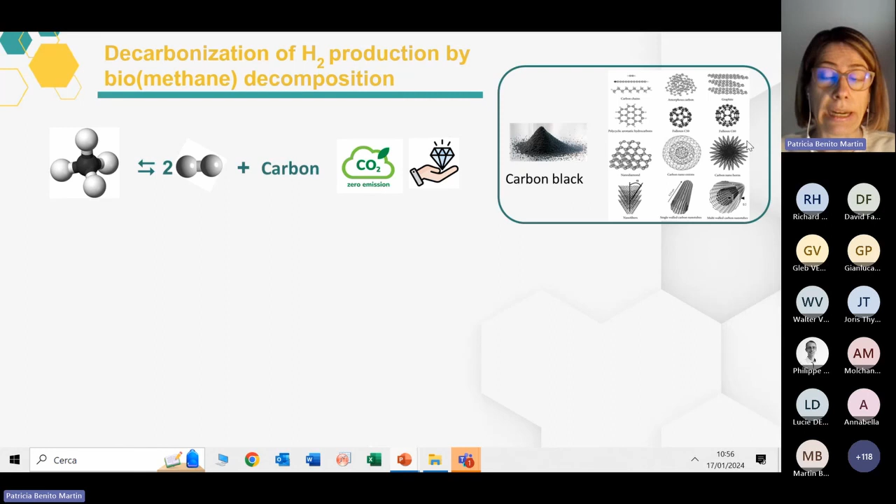But the added value will depend on the type of carbon. So we can produce carbon black, amorphous, or move to other more crystalline and more valuable structures. What is the situation of this process after intensive worldwide research? Some pilot and commercial plants have been deployed. So we can avoid the clogging of the reactor and easily separate hydrogen and carbon by using moving bed, plasma, and liquid bubble column reactors, but all of them only produce carbon black.

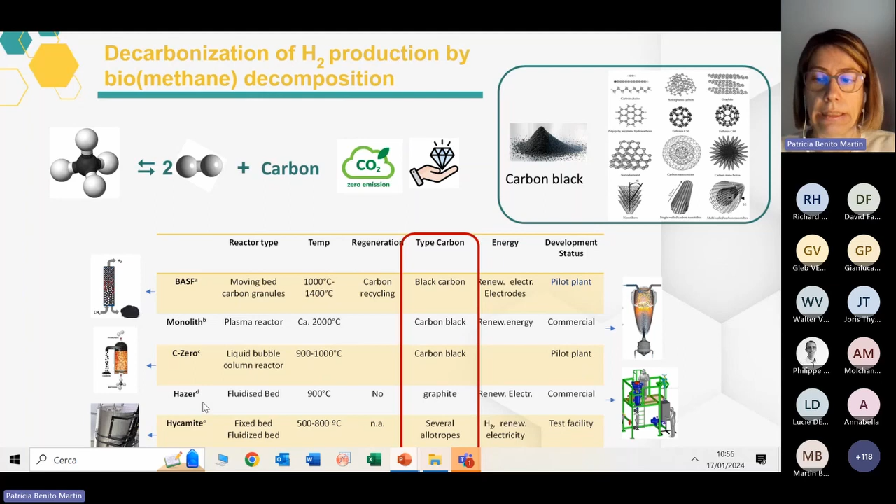So to produce graphite or other crystalline materials, we have to have a look at the processes that use a catalyst. This is because with the catalyst we are able to control the nucleation and the growth of the carbon, leading to ordered materials, but that will depend on the reaction conditions and on the catalyst. So changing the type of catalyst, cobalt, iron, and nickel, we can produce graphite, nanotubes, plates, nanofibers, or even graphene materials.

But as already anticipated in some of the earlier presentations, generating carbon is the reaction that we always want to avoid when producing hydrogen from steam reforming, and this is because carbon has a twofold deactivation effect. It will deactivate the catalytic sites and it will clog the reactor. Moreover, this reaction is less endothermic than steam methane reforming, but still we need to reach high temperatures to achieve a high conversion and in turn a high hydrogen productivity. So we will also have to deal with the heat transfer.

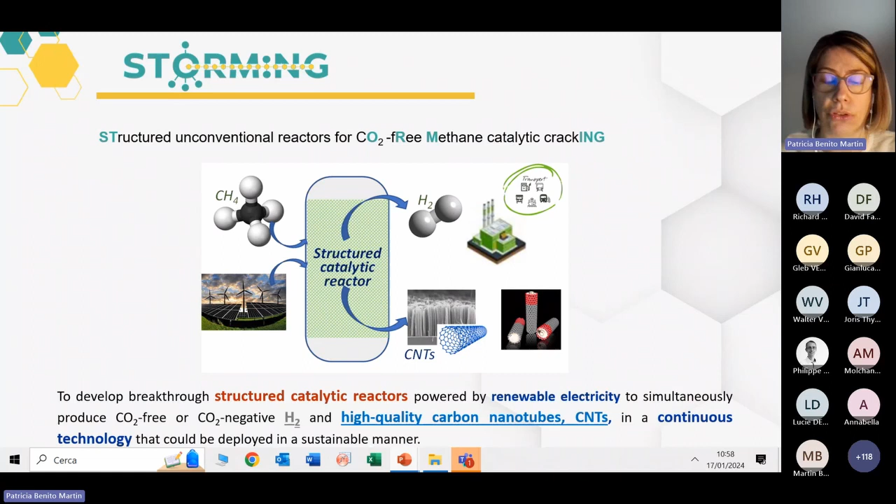What we are doing in STORMING, considering the state of the art and also the challenges, is to develop breakthrough structured catalytic reactors that are powered by renewable electricity to simultaneously produce CO2-free, or CO2-negative in case of using biogas, high quality hydrogen, together with high quality carbon nanotubes. All of this in a continuous technology that could be deployed in a sustainable manner. More in particular, we are designing and developing catalysts and catalytic reactors that operate in a continuous mode with maximized efficiency.

We are focusing on the production of captive hydrogen, so on-site production. And the reason for using carbon nanotubes is because they are the economic credit that will reduce the cost of hydrogen. In particular, we are working with parallel reactors operating in a cyclic mode, switching the feedstock feed and the regeneration agent between both reactors. Besides our core technology, we are considering all of the value chain, from the purification and separation of the biogas to the purification of hydrogen. In the proposal phase we also proposed natural gas, but after the geopolitical changes, we decided to focus only on biogas.

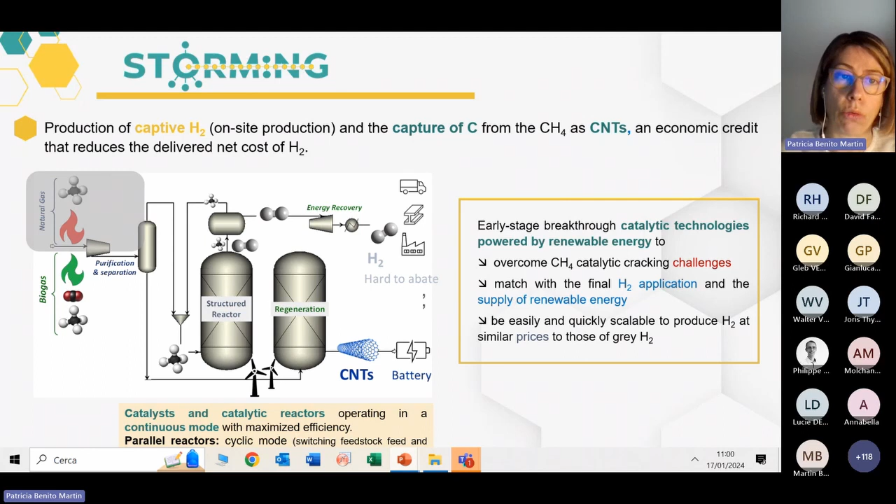So the technologies are early stage breakthrough catalytic technologies powered by renewable energy, and our aim is to overcome methane catalytic cracking challenges and match with the final hydrogen application, but also with the supply of renewable energy, and be easily and quickly scalable to produce hydrogen at a low cost. The reason that we are here is that we are also using electrified reactors to improve the heat transfer. And in STORMING, we are currently comparing 3 complementary structured catalytic reactors.

We have Joule, microwave and induction heating. So we will generate the heat by passing a current through a resistive material, by the selective dielectric heating of catalytic materials, or by the selective heating of ferromagnetic materials. So we have 3 different ways of heating, but we chose all of them because they show common advantages. Our aim is to directly heat the catalyst in order to decrease the temperature gradients and heat losses, and in the end increase the heating efficiency, all of this with a quick startup time. We are using these structured catalytic reactors, and what are they? We are designing 3D engineered structured materials with the above properties, and these properties are not only catalytic ones.

We are preparing the materials by 3D printing, guided by computational fluid dynamics, to have devices with an advanced design, easy production, and high adaptation. The key that we are trying to achieve is to combine geometrical parameters and composition to, first of all, have the right heating, so resistance, the dielectric properties or ferromagnetic properties, but also combining with low pressure drop and a mechanical stability that is very important because we are generating a solid inside the reactor, and also heat and mass transfer. And all of these parameters will determine the activity.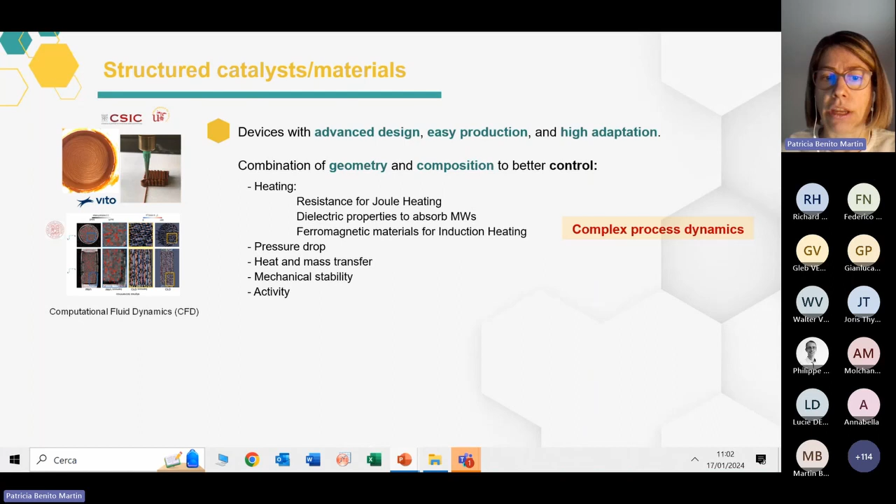But we have to consider that this process follows complex dynamics because we are modifying both the gas phase and the solid phase composition. And these modifications are taking place both within the length of the reactor and the time on stream.

So what about the catalyst? We are also using, like in Titan, iron-based catalysts, because like nickel, they are able to promote the carbon nanotube growth, and because they are non-toxic and easily available. And for us, another advantage is that they are more active and stable than nickel. So considering the endothermicity, it will be possible to reach high thermodynamic equilibrium values. But we know that the catalyst deactivates.

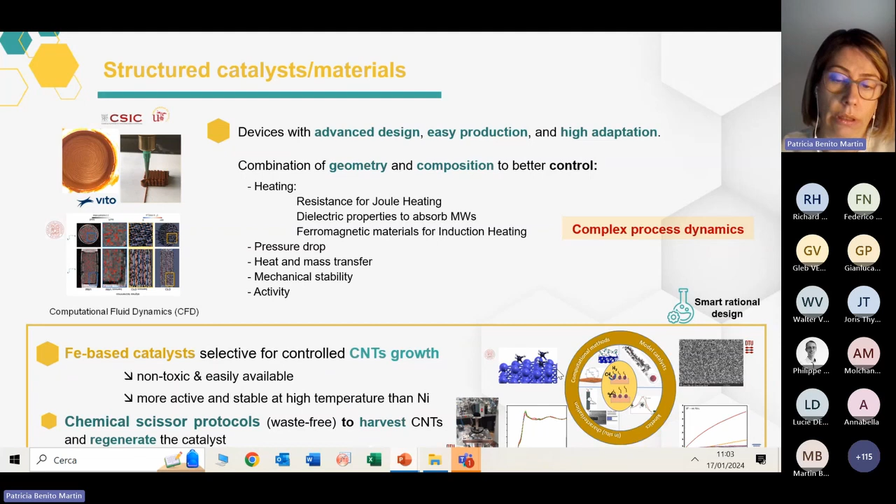So a key is to find a treatment able to regenerate the catalyst and to harvest the carbon nanotubes by a waste-free method, what we call chemical scissor protocols. This is base research that we are performing by the combination of ab initio computational methods, model catalysts, and also in situ and operando characterization.

So we hope that the research that we are doing in Storming will help to have a positive impact in the production of hydrogen in comparison with steam methane reforming coupled with CCS. And this is because switching to renewable energy and using electrified reactors will improve the energy efficiency, that can be around 60% and even higher if we consider carbon nanotubes with 100% selectivity.

Moreover, we are using structured reactors, so process intensification, smaller reactors able to operate under transient conditions that are determined by the supply and demand requirements. All of this avoiding greenhouse emissions because we have the electrified reactor and we are capturing the carbon as a solid. And with a 10% decrease in the cost compared to steam methane reforming coupled with CCS.

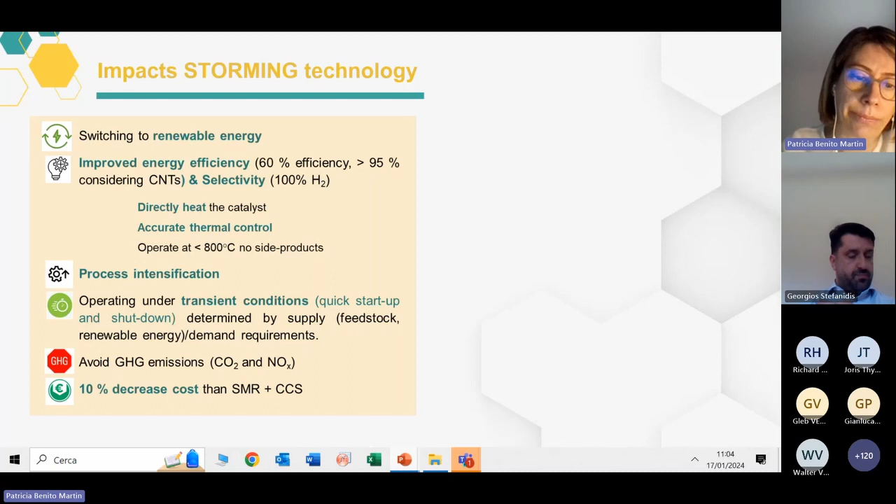We have some ideas on what can be the application of the hydrogen. This could be used in hydrogen refueling stations for trucks. And we can also contribute to decrease CO2 emissions for hard-to-abate industry. One possibility could be to replace methane in high-temperature combustion ovens for the tile ceramic industry, but also for small-scale applications of hydrogen, such as in the brightening of steel or in the tin bath for float glass. And last but not least, also in the chemical industry for small plants producing ammonia.

But what about the carbon nanotubes? In Storming, we are producing multi-wall carbon nanotubes, and we are focusing on their application for batteries. This is because the efficiency of energy storage can be increased, but also because at the same time we can replace graphite, that is a critical raw material.

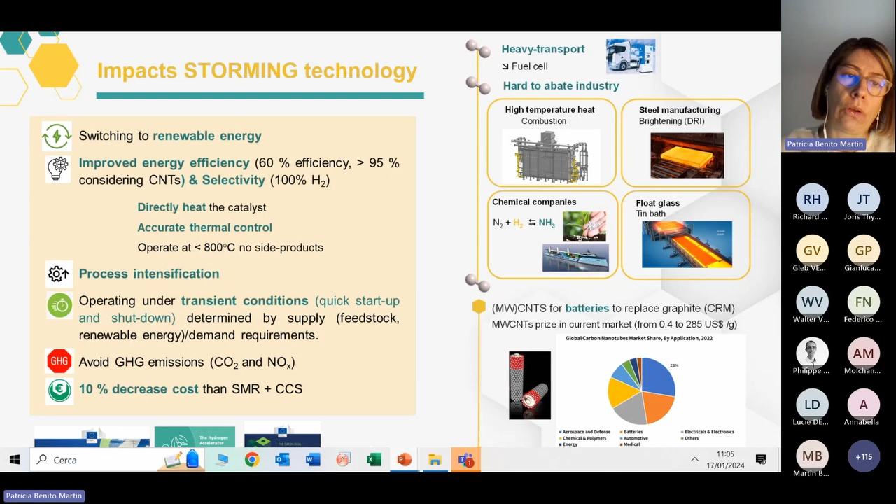So at the end of Storming, we will validate one of the most promising catalytic technologies. So only one will achieve TRL 5, and we will perform a sustainability assessment, including economic, technical, and environmental aspects. The vision of the Storming Consortium is that the technology could in the future be scaled up until reaching the deployment of a small or medium scale hydrogen production plant.

To follow the pathway to this higher TRL, for sure we will need to design and build demonstration and small plants directly fed with biogas, because at the end of Storming we will only feed synthetic biogas, and optimize the parameters to produce high quality hydrogen and carbon nanotubes. But also, if we have a look at the mass balance of the reaction, you can see that we are producing 3 times the mass of carbon nanotubes than the mass of hydrogen.

So our aim during Storming and beyond is to foster the carbon nanotube market. Currently, this is a niche market, a small market, but this is not because of the properties of carbon nanotubes. Indeed, they have outstanding properties, but because of their high price. So to go further on this pathway to a higher TRL, we should catalyze the carbon nanotube market, decreasing the price of the materials without decreasing the quality, fostering applications in markets such as batteries, as in Storming, and also in other sectors such as composites or cement.

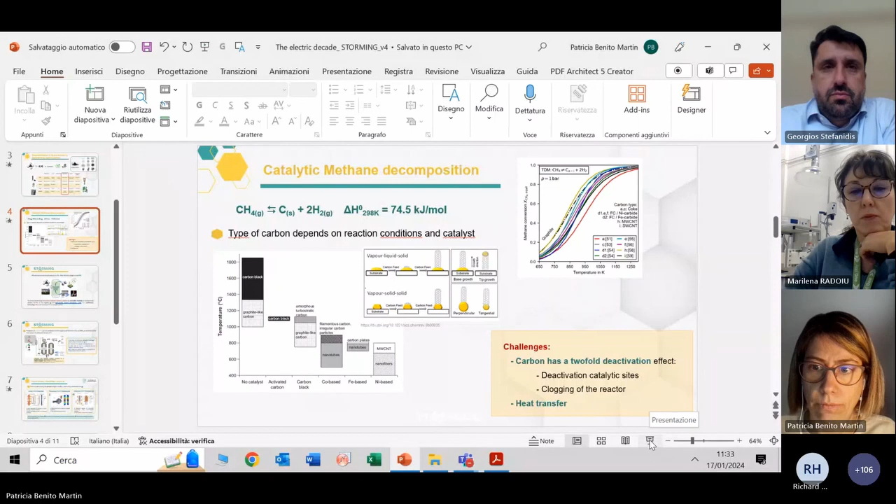So what is the target operating temperature? Okay, and this is in Kelvin. What would be the expected conversion? Can you, so what would be the temperature that you'll be working at? Okay, we are working at temperatures below 800 degrees C. So this is in Kelvin, so we'll be more or less here. Yeah. So we can reach conversion up to 90%. Up to 90%, okay.

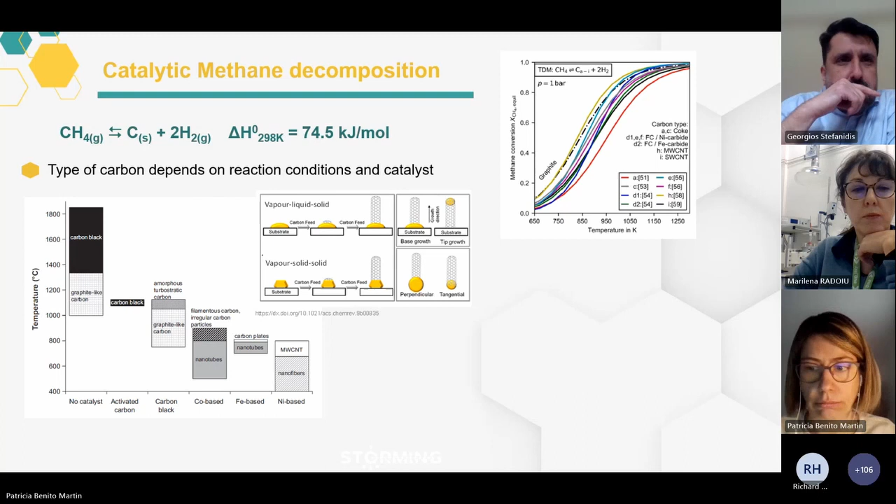This graph I took from an article, because there are some claims that depending on the type of carbon nanotube that you will form, your conversion will change, because you are changing your product. So for sure we can reach conversion above 80%. And if I see the left graph, multi-wall CNTs require temperatures of 700 to 800 degrees Celsius. Yeah, we can produce them. We are producing them at 700 degrees C right now.

Okay. And can you please define again the 60% efficiency? What is the definition exactly? This definition was considered, and I was waiting also for Haidir, but they cannot participate. We considered and took into account the enthalpy of the reaction and the amount of heat that we have to provide in comparison with the

steam methane reforming, and considering that we don't have to provide heat to evaporate the water, and considering that we have an electrified reactor where all of the energy will be transferred to the reaction. So we don't have heat to heat the gases. And we consider then the amount of energy produced for the hydrogen. So more or less, these are the calculations.

Thanks, Patricia. I have a last question related to fluidization. If I understand well, you're going to do fixed bed experiments and fluidized bed experiments, correct? Yeah. Okay. These two types of reactors, and most likely you're going to work in the fast or turbulent fluidization regime because you need to get the catalyst out. So the residence times will be different in the two types of reactors. You'll have the same temperature, or at least you target the same temperature, the one that is needed to produce carbon nanotubes, but the contact times will be different.